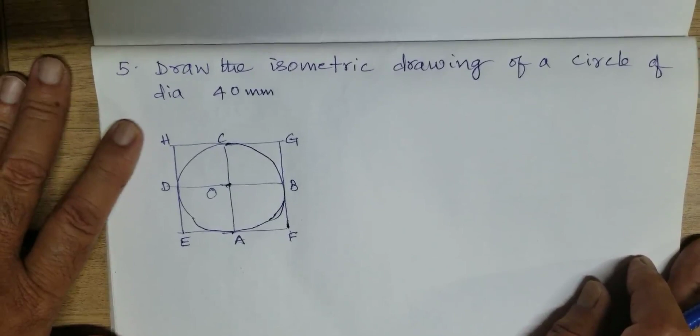I would like to explain isometric drawing of a circle of 40 mm dia. See, this is the question. So here I am asking about isometric drawing. Isometric drawing and view both are same. We have to take original dimensions.

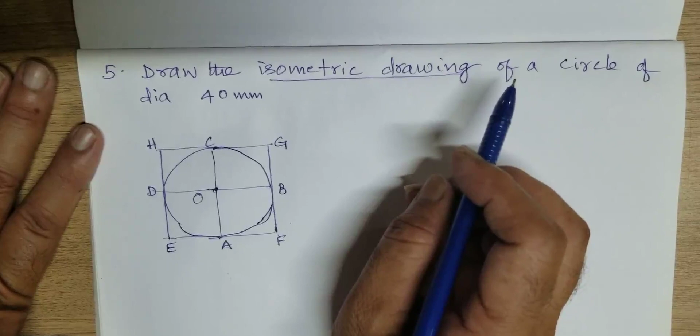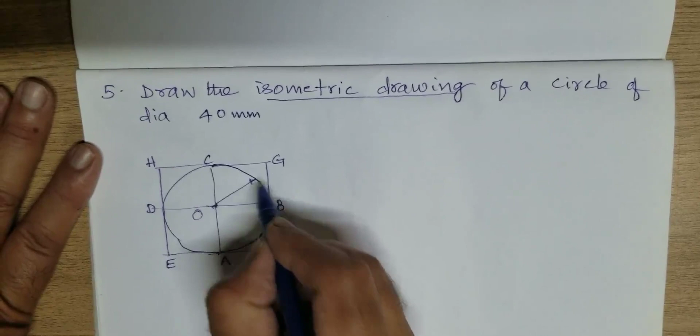So here first we have to draw the circle on a drawing sheet. This circle we have to draw it, O as the center. This is the radius, and this is the dia, like this, 40. This one we have to draw it on a drawing sheet. Unless we are having this drawing, we cannot complete this question on our drawing sheet.

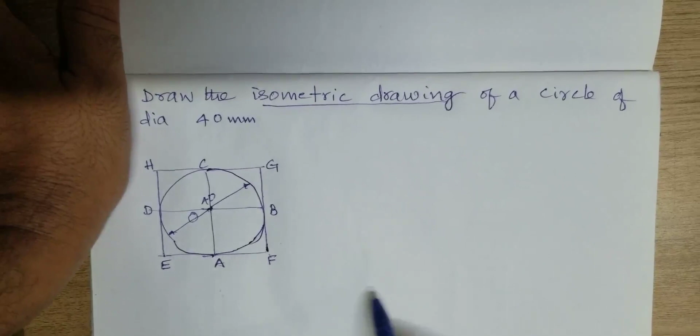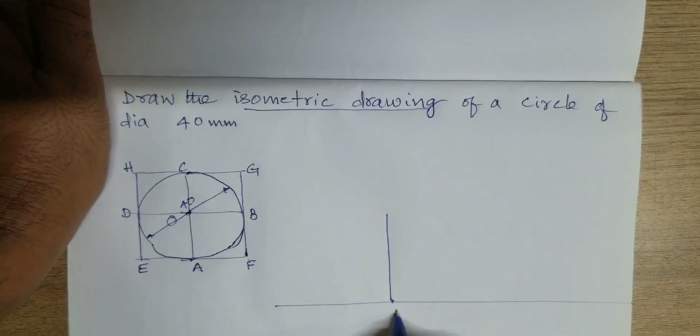Now, first of all, we have to incorporate this square on an isometric drawing. The square, how we have to do it? This FG I am taking vertical. Whatever the length that is there, the 40 only here. So it is FG. Now the FE length we have to take on the 30-degree line. The length is equivalent to 40 only because it is isometric drawing.

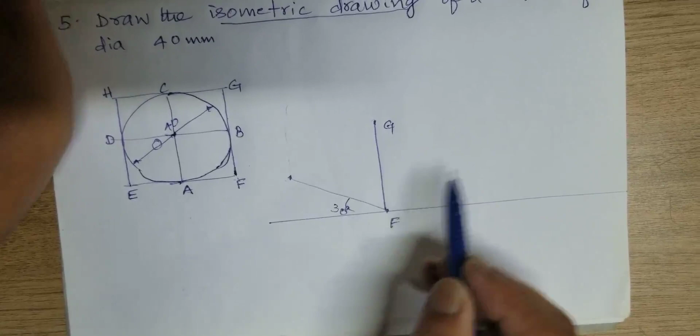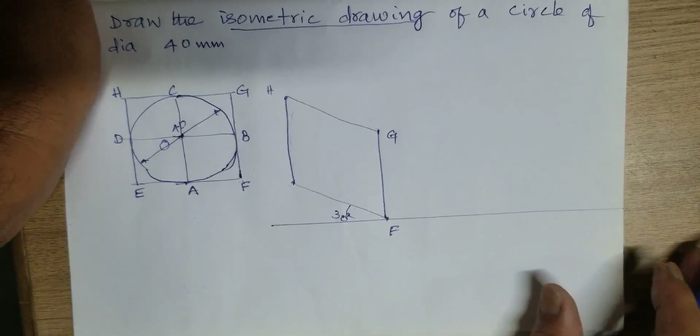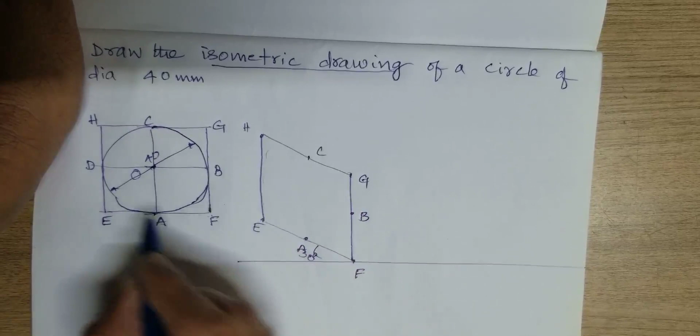Now this line is parallel to this line. Keep your mini drafter here, draw it here. Whatever the length, you take it here. This is H. You join these two. So here we got all 4 points. A is the middle of EF. Here we are having B, middle of FG. Here we know C point, middle of HG. Here we know middle of HE, D, like that.

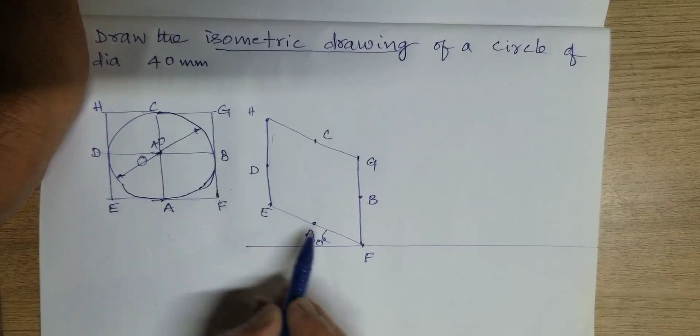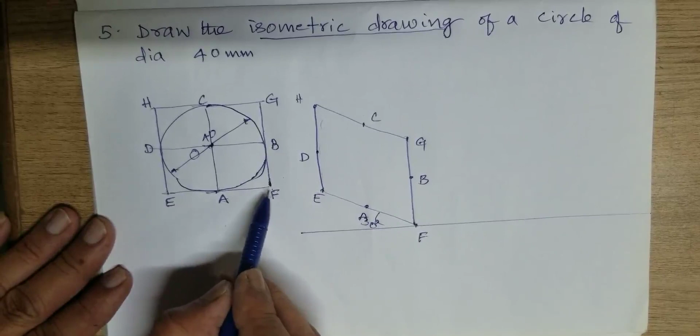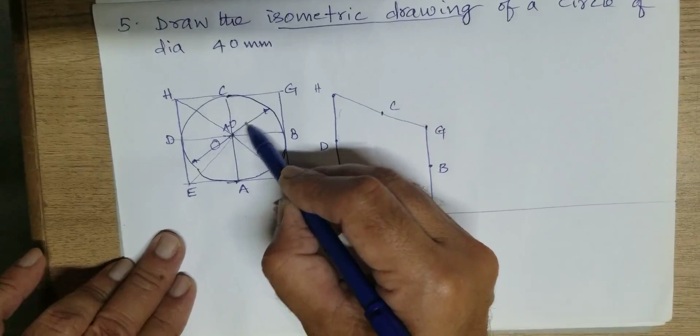With 4 points, we are unable to draw the circle. That is the problem here. So you have to generate 4 more points. How you can generate is join F and H from the center. Of course, it is passing through the center only. And here also draw E and G from this O. Now you see we got 4 more points intersecting on the circle.

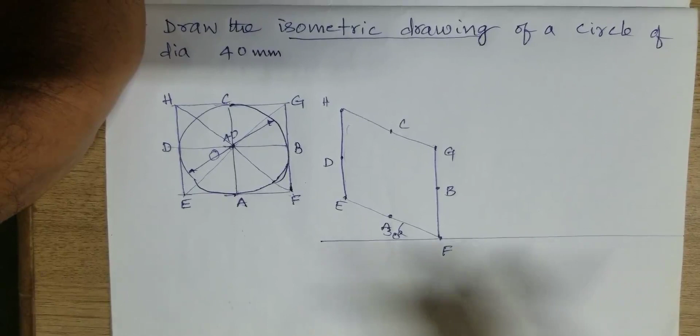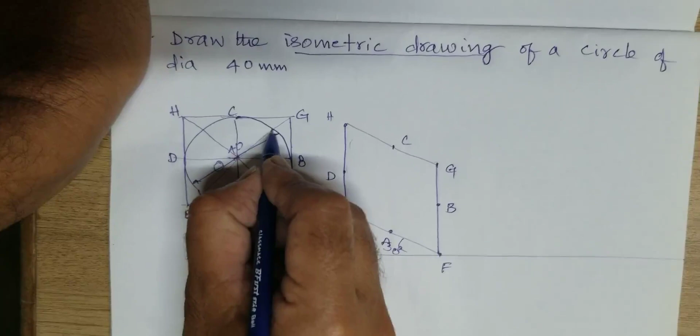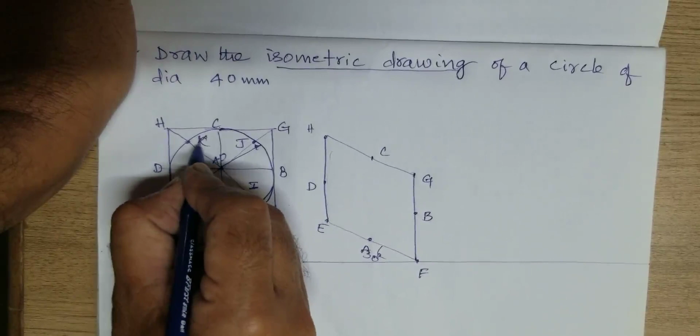So A, B, C, D, these 4 points. The other 4 points I can mark, see here. In between A and B I can mark this point, let us say I. In between B and C I am getting 1 more point, J. In between C and D I am getting 1 more point, K. In between A and D we are getting 1 more point, L. These 4 points also we have to mark on this rectangle.

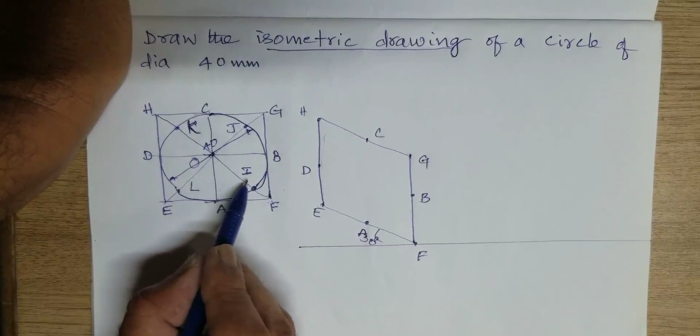How we can do it? We are getting A, B, C, D. We have to incorporate these 4 other points. To identify the I point, it will be there on the line from H to F. Join H to F here, as well as E to G. This I point we have to mark. Draw the vertical line from here, horizontal line from here with 2H pencil.

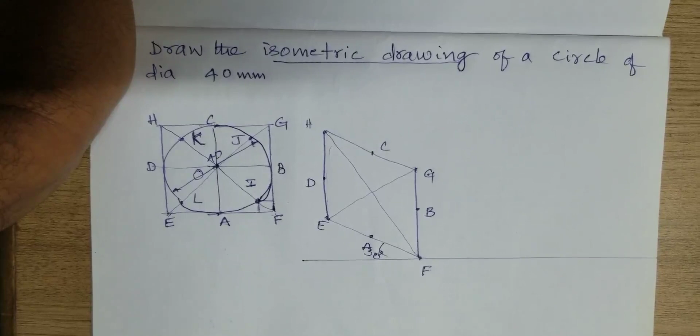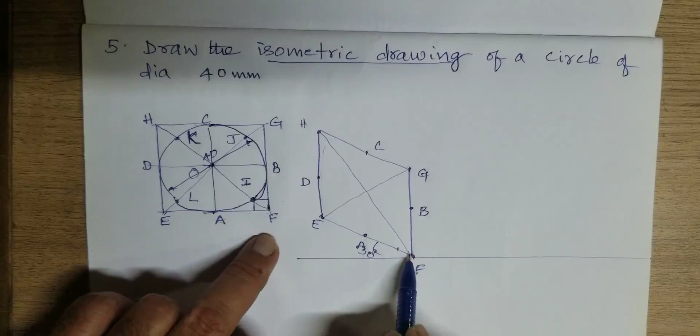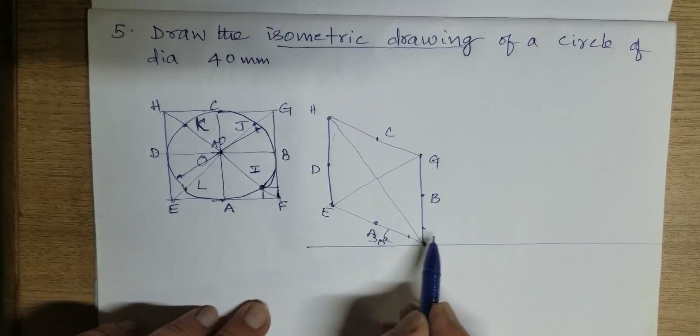We are getting these 2 points. From F, measure the distance, put the point towards E. From F towards B, measure the distance. Like this. Now, this line we have to draw the parallel line for this line, and this line, parallel line for this line. So, we are getting this point I.

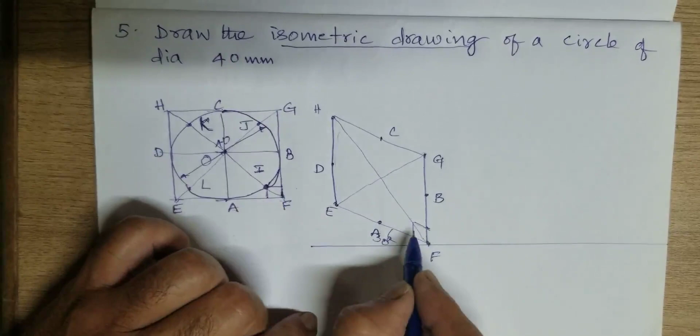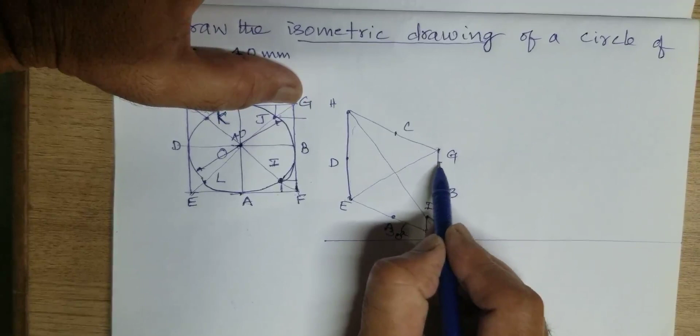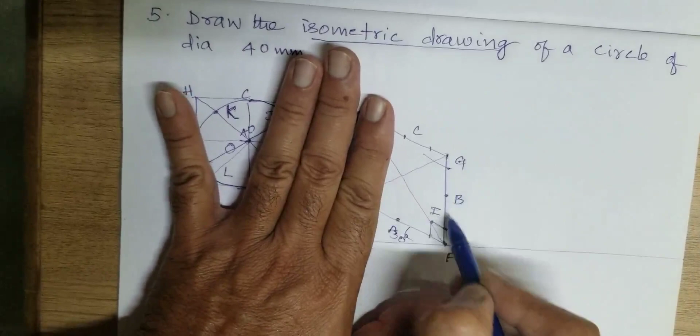How we are getting this J? Here also same thing. Draw the horizontal line and vertical line. Measure the distance from G vertically. Measure the distance on this line. This line we have to draw a parallel line for this line. This line vertical, parallel line for this line. Now, we are getting this point J.

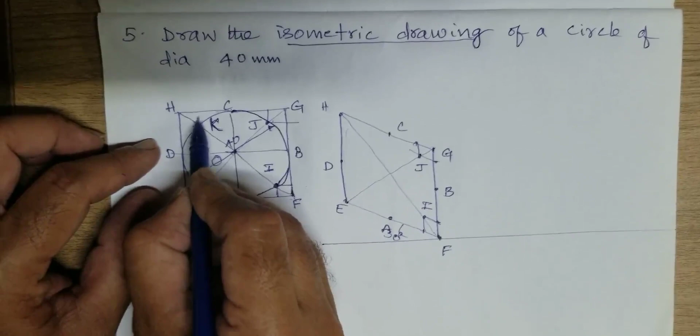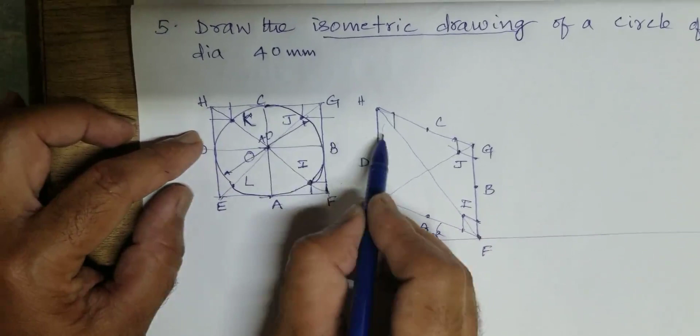K, how we are getting? Draw the line vertical, horizontal. This distance in between HG, you measure the distance, vertical. Measure the distance, horizontal. So, we are getting this point K. Likewise, we are getting L. This horizontal distance, you measure it here. This vertical distance, measure it here.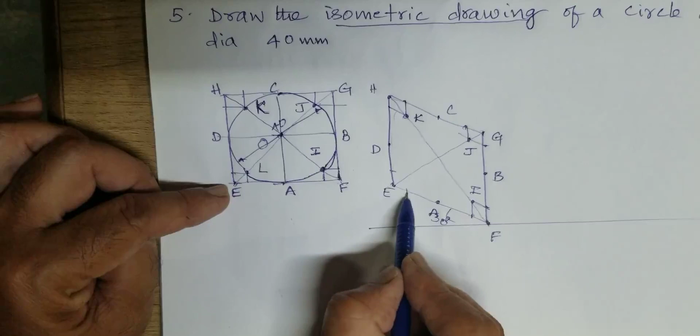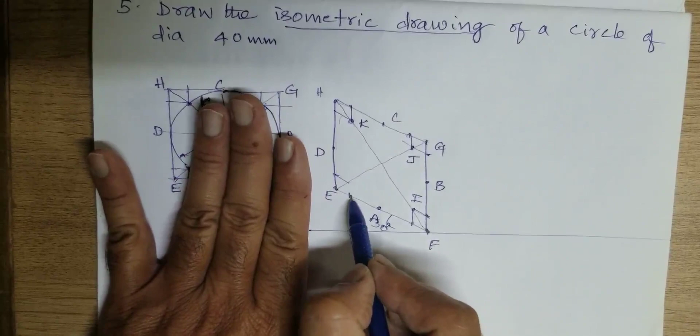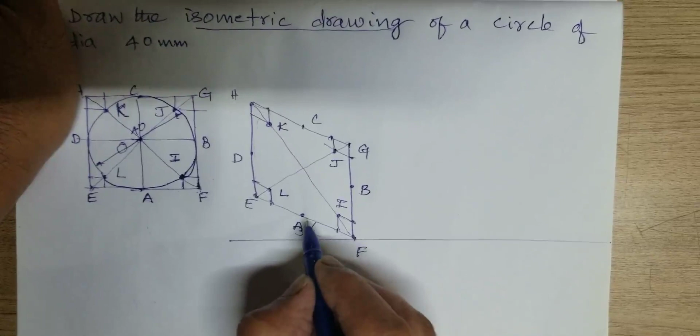How we have to get it? From this point, we have to draw the parallel line for this line, and from this point, parallel line for this line. So how many points we got now? 8 points. Earlier we had A, B, C, D; beside it, I, J, K, L. You join them with a smooth curve. Initially use 2H pencil, so you can erase it if you are not getting it properly.

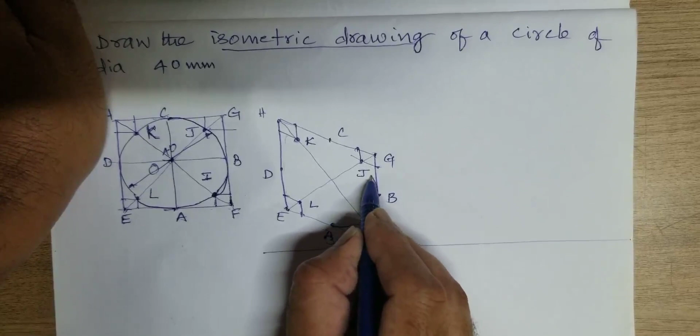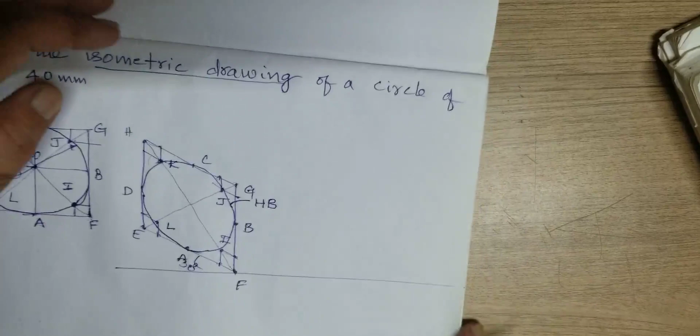See how we are going to have it. This is how we are going to have it. We mark this with HB pencil. Once we are getting a good circle, make it dark. These remaining things you do with 2H pencil. Likewise, see it, reverse, I would like to do it.

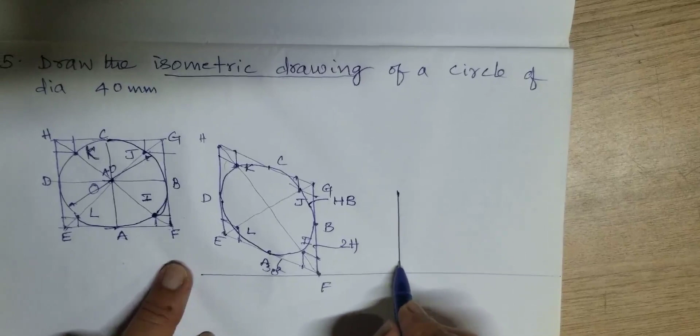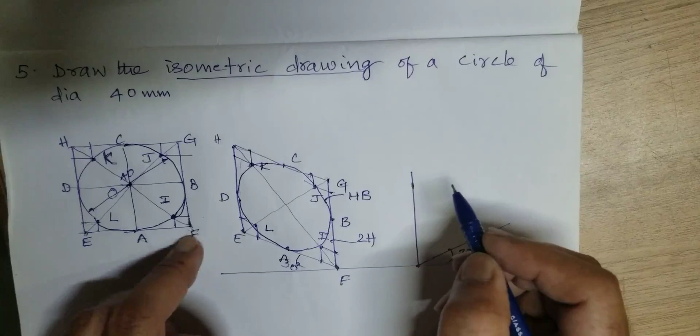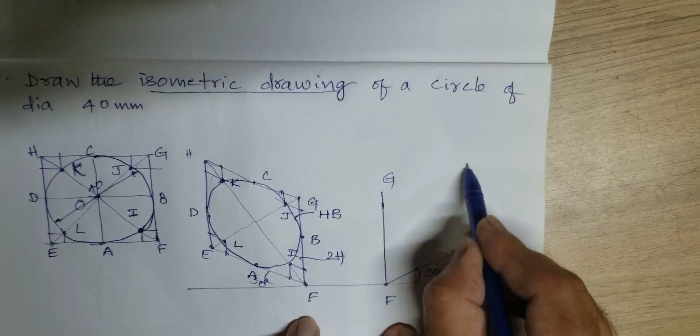I am taking this length vertically, this length inclined way. This is the length because with isometric drawing, 40. Here also on 30-degree line, 40. So this is the length of F to G. This is the length of E to F. So these two lines you join, parallel to this one, parallel to this one, like this we can get it.

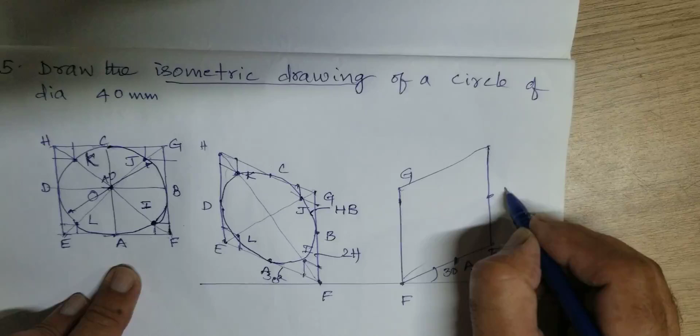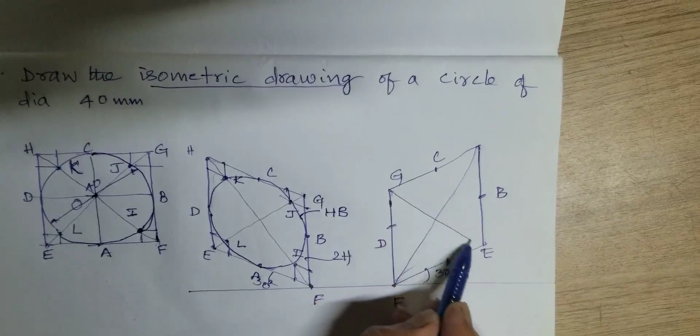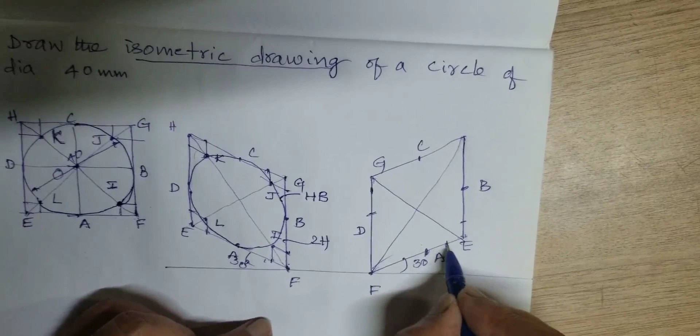Now we are getting 4 points. It is the middle point of E to F. All middle points, we are getting 4 points: A, middle point B, middle point C, middle point D. Right? Now, 2 more points we can get by joining this line with this line, this line with this line. Here we wanted to have the point I, how are we going to have it? You measure the distance here, measure the distance here. From here a vertical line, from here a horizontal line, we are getting one more point I.

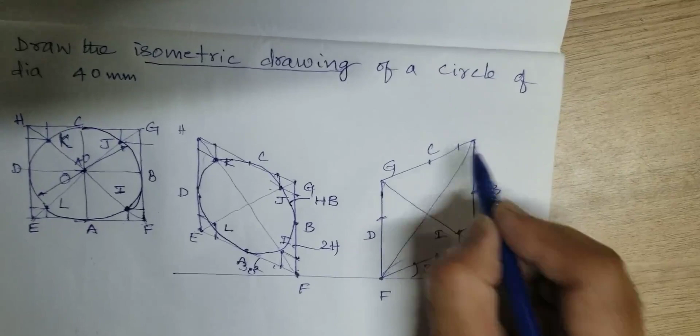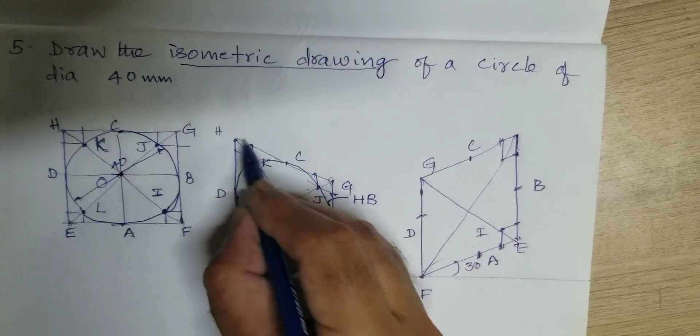Likewise here, you measure the distance here, measure the distance here. From here we have to draw the parallel line for this line, and from here the parallel line for this line. Here also we are getting one more point. Measure the distance from here, measure the distance from here. You draw this, we are getting this point. Here also measure the distance, parallel line for this line, parallel line for this line. We are getting all these points. See, this is I, J, K, L.

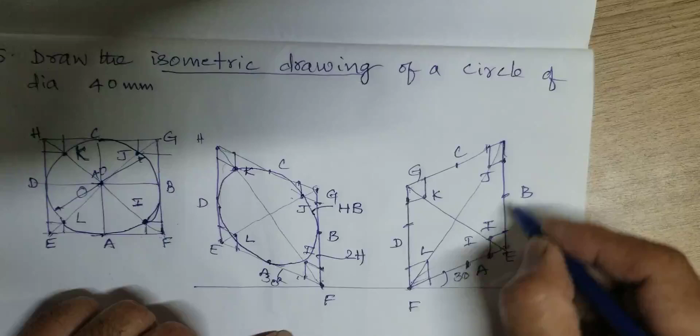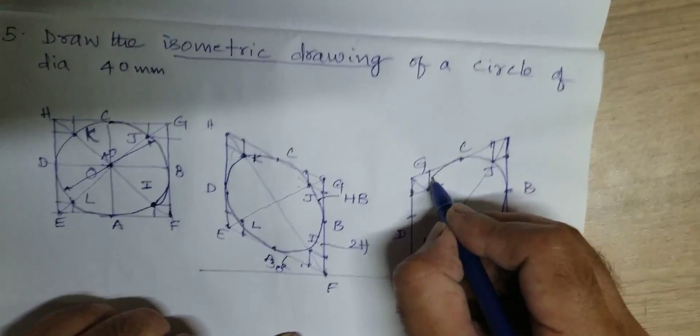You join A to B. While we are joining A to B, you join along with I. B to C, join along with J. C to D, join along with K. Join with this point A, join with L. See how you are getting it. This is how we are going to have this.

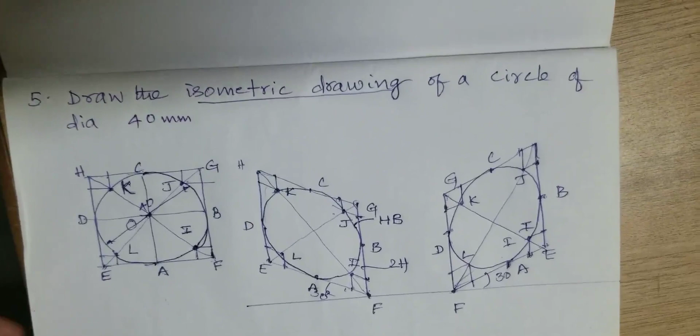And one more is there, I would like to explain that. If you are having these two sides of a cube, what you did in a cube top view, that I would like to explain over here. See here, the third one. So, one side we have to take on 30-degree line. The other side also we have to take on 30-degree line, 30-degree line in 40 dimension. Here how we have to do it? From here we have to take whatever the length it is. From here we have to take whatever the length it is.

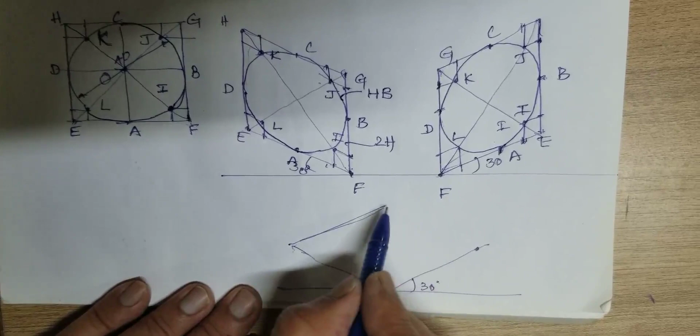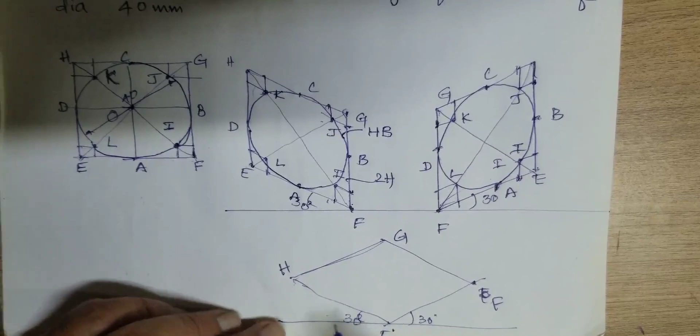We know side, front and top. Here we know all the points. Let us say you can mark it E, F, same thing I am going to write. E, F, G, H, E, like this. So we got 4 points. A point is on E to F. This is A, middle point B, middle point C, middle point D. So we are going to have other points joining with H to F and G to E, like this. So we are getting these 2 points.

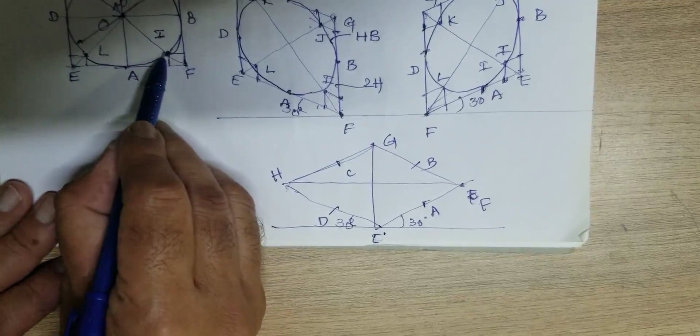Let us say you wanted to have I point, it is in A to B. How is it there? You can mark like this. You measure the distance F to I here. We are getting this point I over here, no problem. We can keep all likewise. You measure the distance from this point to this point because this line is H to F. Measure it on H to F line, this length, put the point I. Likewise, you measure the distance here, mark the point K, like this.

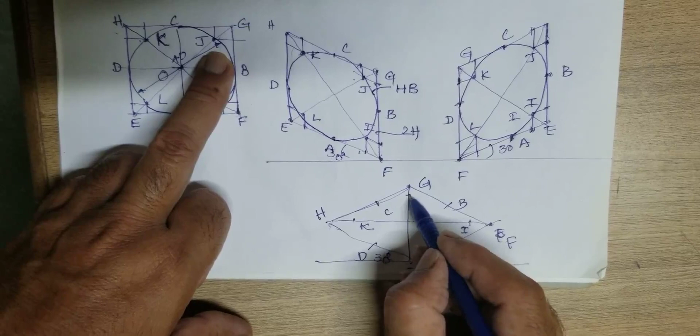Here, on this G to E, there is a G to E. Measure the length G to J, whatever the length is, you put the point here, what we are calling J. Measure the length L, mark the point L here. So now join the points.

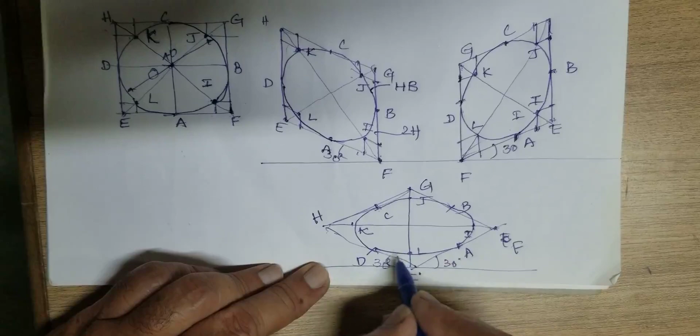A to B. When you are joining A to B, go along with I. So it will come like this. When you are joining with C, go with J. When you are joining D, go with K. When you are joining with A, go with L. Just see how we are going to have it. This is how we are going to have it. Stop it.